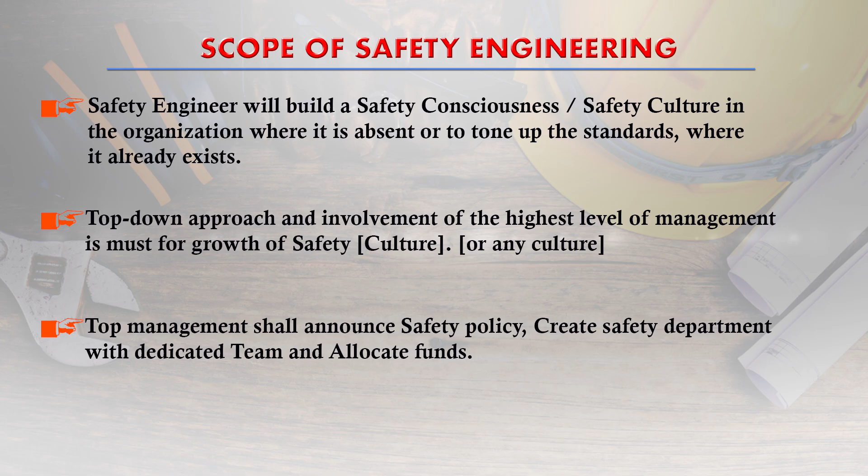Line managers and supervisors shall execute safety policy, create safety awareness, arrange training, and implement safety rules and regulations. The supervisor will ensure that workmen use and maintain personal protective equipment (PPEs) and devices appropriately.

Safety engineers will also ensure sound health of workmen. For example, inhaling welding fumes may not cause imminent harm, but can be very detrimental to health in the long term.

Situations in the workplace may also cause psychological stress or mental stress that may result in accidents. Safety engineers, industrial hygienists, health physicists, occupational therapists, and risk managers may help in reducing such stress and avoiding accidents.

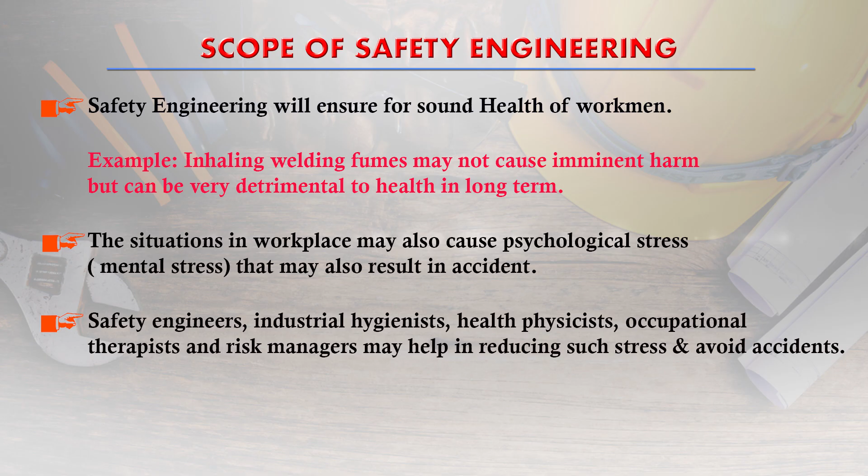Engineers shall design, devise, and develop processes that will reduce or eliminate any risk during operation. For example, employing safety guards for moving machinery parts - this is the task of a safety engineer. Also interlocking machine movements liable to cause injury, etc.

Engineers should also try to avoid the use of hazardous material, or ensure safe handling of hazardous materials.

Question 2: As a safety engineer in an industry, what are the aspects you need to look into? Under what circumstances does the safety policy of an organization fail? Briefly describe the various levels of responsibility in the safety cell of a large organization. What are the different safety functions? What type of occupational health hazards are usually found in Indian industry?

All these questions shall be answered in the subsequent discussions.

Evolution of safety starts in 1750 to 1760. Safety started during the Industrial Revolution and the invention of the steam engine. In 1900, power started being used in industry.

Industrial expansion started taking place, and the increase in workforce resulted in an increase in industrial accidents. At that time, safety was deemed to be about attending to cuts, bruises, and broken bones of factory workmen.

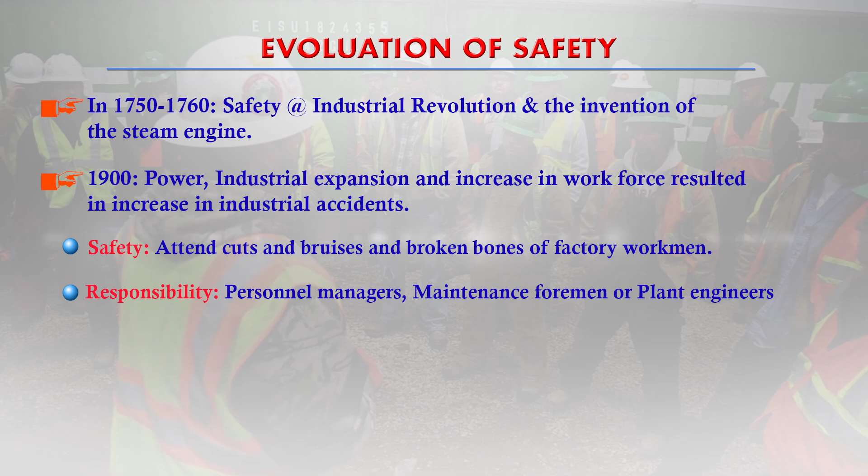What was the responsibility for safety? It was the personnel manager and the maintenance foreman or plant engineers who were responsible for any accident or for enforcing the safety system. What was the action?

Action was that at that time, whenever there was any accident due to cut or bruises or any other unwanted event, action was to guard the machine, or provide a face shield, or make workmen use gloves and wear glasses. That is simply PPE, during some specific activities.

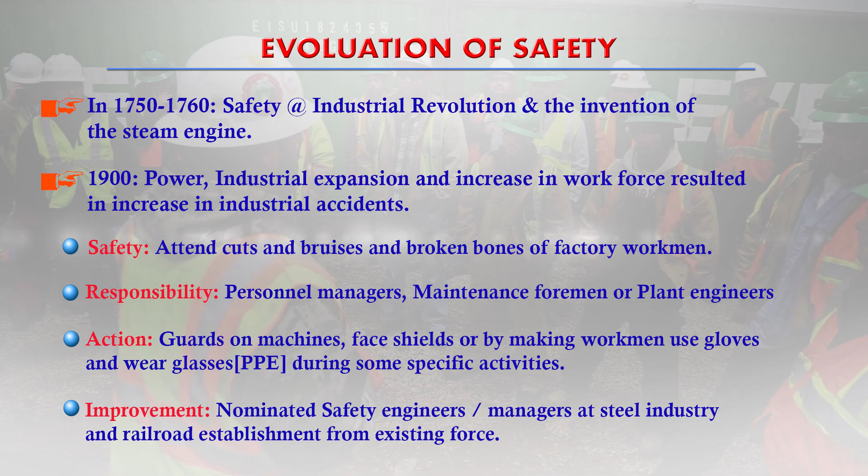This was the action. What was the improvement with due course of time? Safety engineers and managers were nominated at steel industry and railroad establishments from existing force. In 1920, safety codes were published, called the American Standards Association Safety Codes. During World War II, whatever safety efforts were made from 1920 till the start of the war vanished, because the main intention during the war was to win it. Therefore, government had to sacrifice safety considerably in favor of the desire to win the war. Safety was perceived as a non-productive activity till the end of the war.

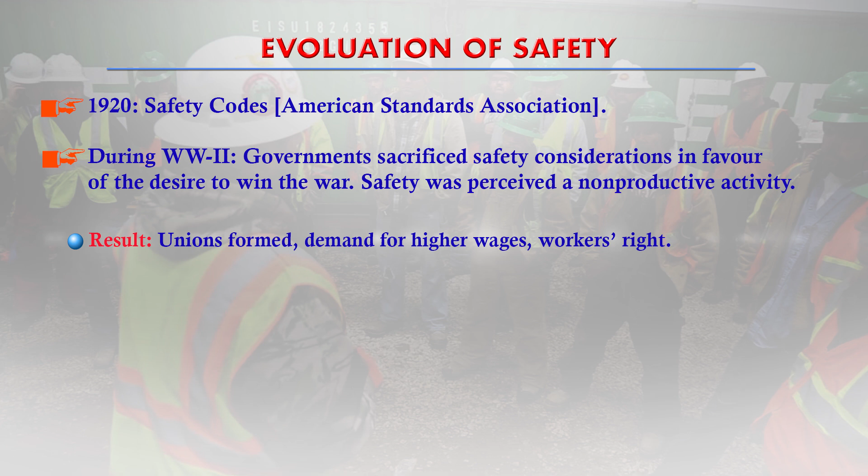What was the result? Unions were formed. Demand for higher wages was bargained, and workers' rights were demanded. All these things came because of more accidents, more unwanted events. After World War II, it was felt that safe working is key to productivity. Why, we will find out in the subsequent talk.

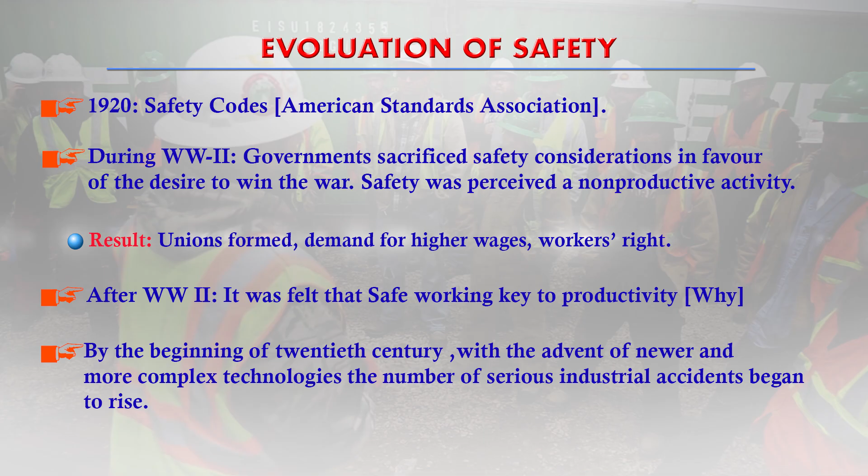By the beginning of the 20th century, with the advent of newer and more complex technologies, the number of serious industrial accidents began to rise. Factory managers felt the need of abating the causes of rising accidents and poor health conditions in workplaces that were affecting productivity.

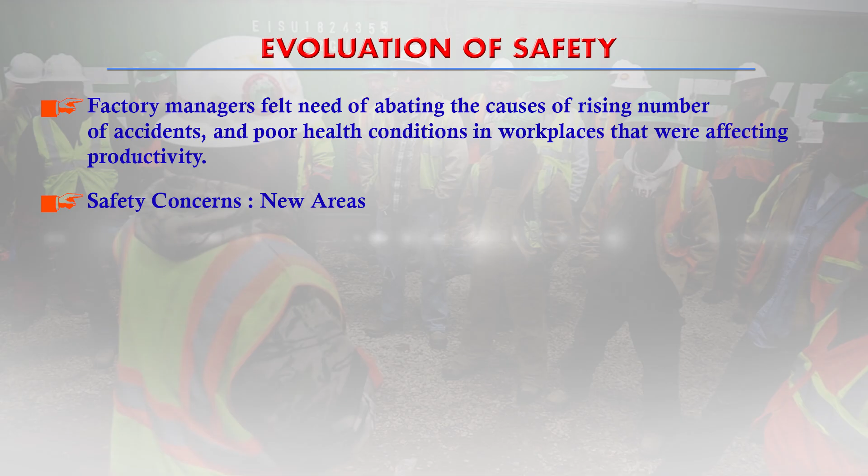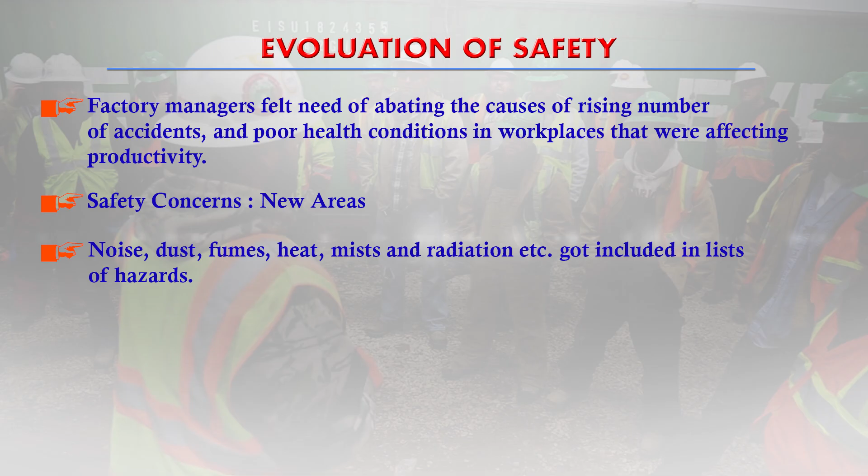Safety concerns were in new areas - noise, dust, fumes, heat, mist and radiation - which started increasing due to new development, new technology and the desire for higher production and higher profitability. They all resulted in higher levels of noise, dust, fumes, heat, mist and radiation, and all got included in the list of hazards.

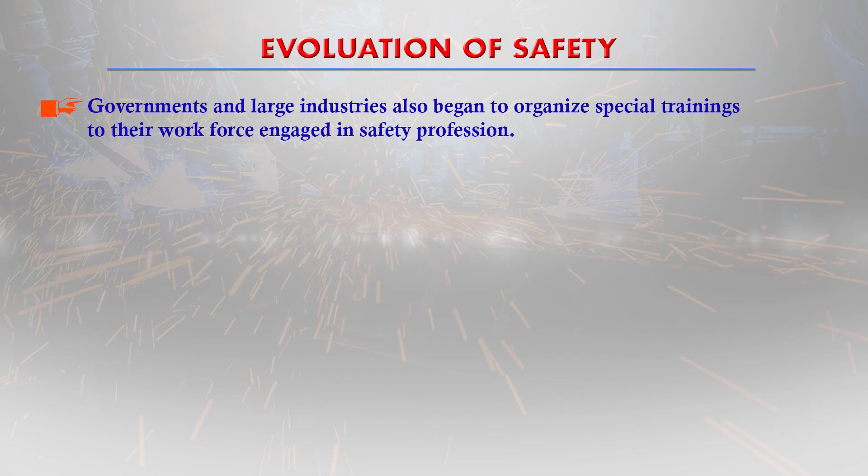Governments and large industries also began to organize special training for their workforce engaged in the safety profession. Industrial hygiene, health physics, ergonomics, design engineering, illumination engineering, audiology, etc. and safety administration were added to safety. Research work and safety theories propelled safety practices into an academic body of knowledge and information.

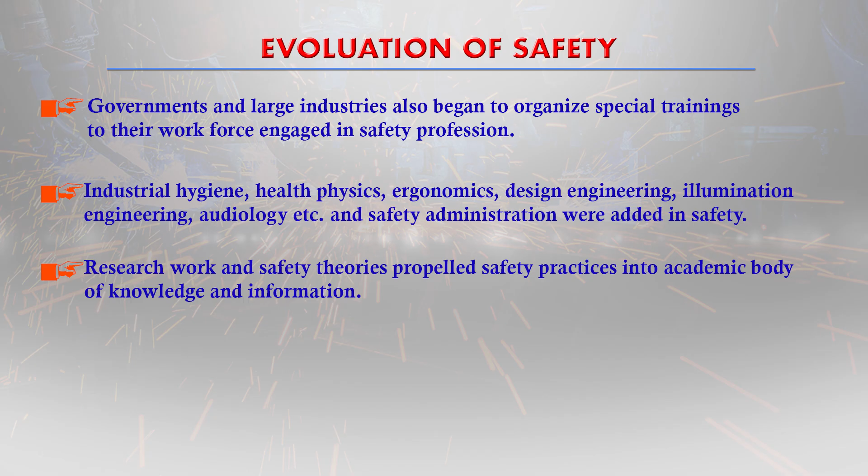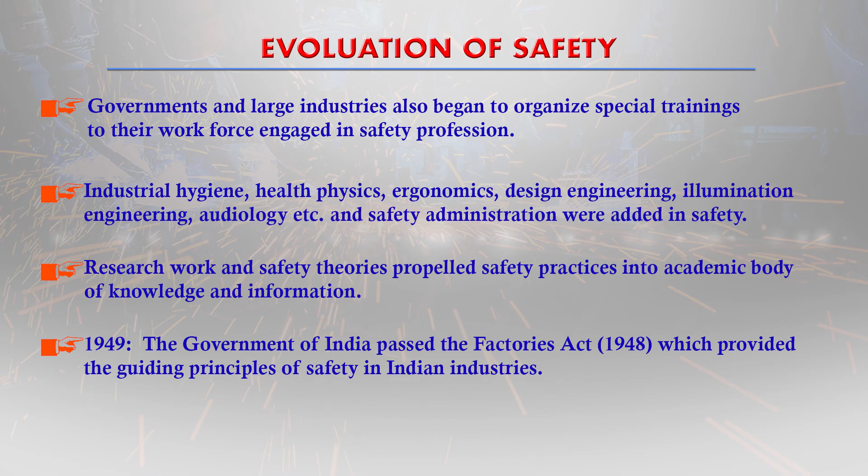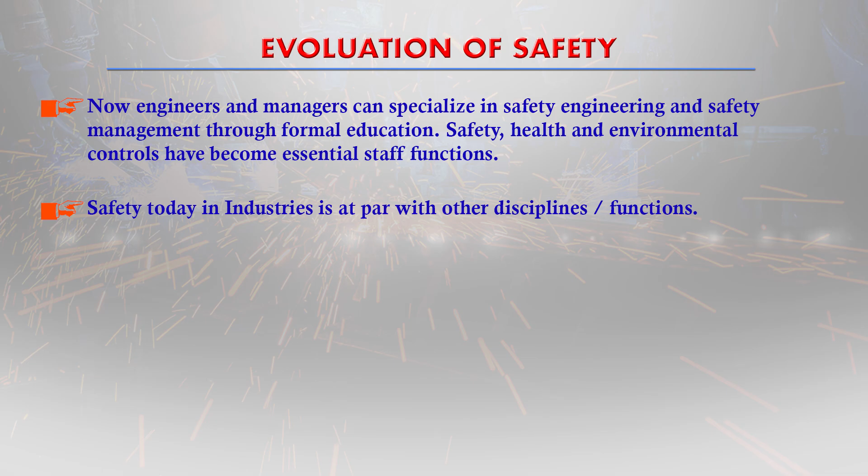In the beginning of 1949, the Government of India passed the Factory Act, which is the backbone of industrial safety for India, providing the guiding principle of safety in Indian industries. Now, engineers and managers can specialize in safety engineering and safety management through formal education. Safety, health and environment controls have become essential staff functions. Safety today in industries is at par with other disciplines and functions.

Every industry must have a safety cell, safety division, a safety department, or in a large organization it is called a safety organization, but it must have some entity which can look after safety with clearly defined objectives and functions. For effective implementation of safety policies, safety shall be a separate department. The head of the division shall be reporting to the head of the organization. Safety personnel will interact with other activities functionally. The structure of the safety cell in an organization will largely depend on the size of its workforce and type of industry.

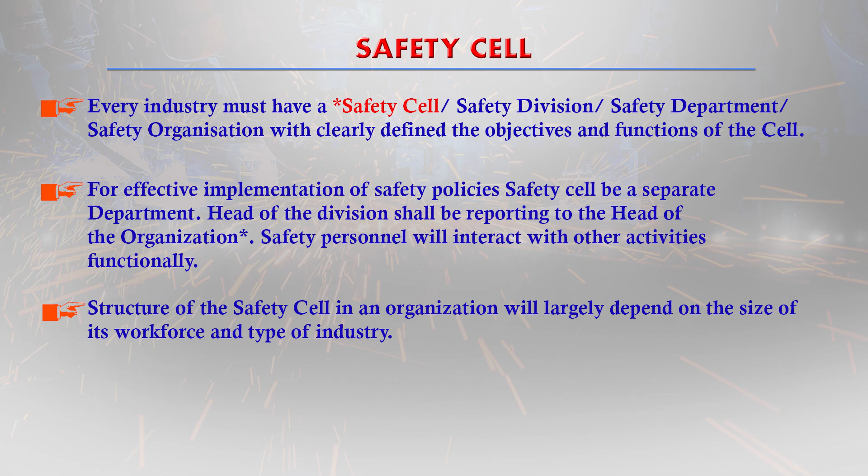A statutory requirement is that as per section 40B of the Factory Act 1948, there must be one or more safety officers employed by certain categories of industries, with qualification as prescribed by the notification of the state government, or if not notified, then as per factory rules. The safety cell structure of a large industry will be discussed in the subsequent slide.

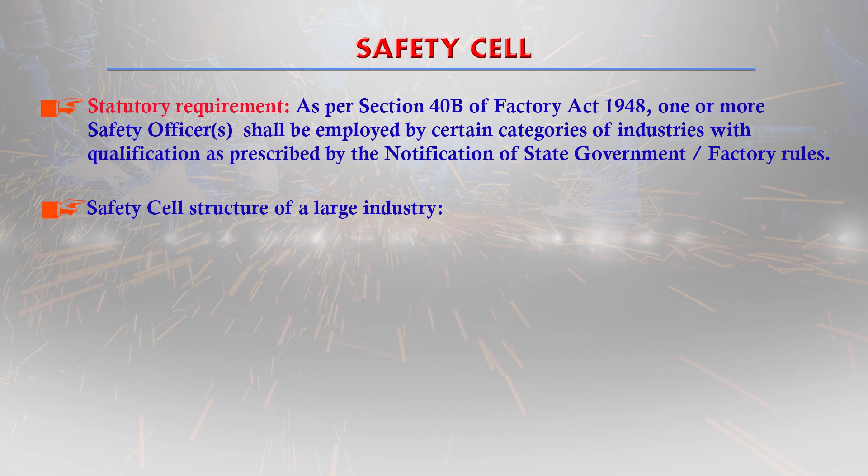In a large industry, a top level manager must be head of the safety cell. The safety chief, normally called general manager, SHE (safety, health and environment), or safety director at the industry level, may report to the corporate director heading the safety cell. There may be several managers reporting to the safety chief, each responsible for special safety functions such as fire, environment, occupational health, claim for compensation, etc. These managers will necessarily interact with all other departments wherever workmen are involved.

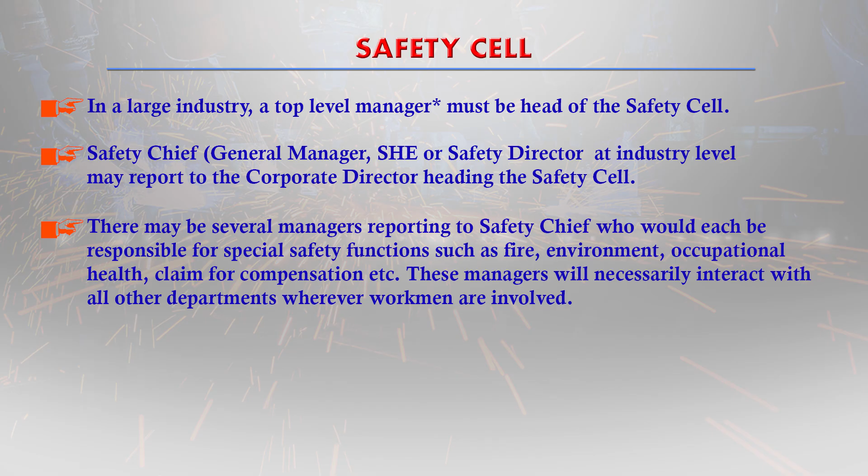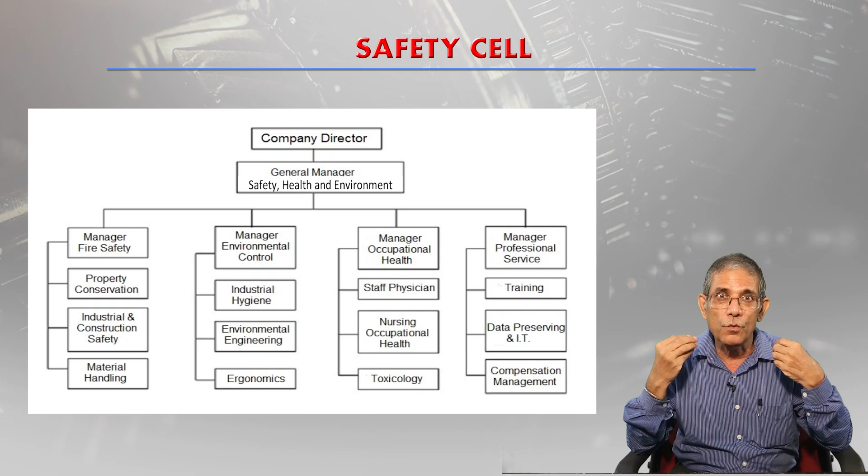There will be a company director, then a general manager safety, health and environment, then several managers depending on the different types of functions - fire safety, environment safety, occupational health and safety, manager professional service. So many departments are created depending on the size of the industry.

If it is a smaller size industry, certainly many roles can be assigned to a single manager. Responsibility of the safety cell at various levels of responsibility are identified and described below. At level 1, the top level, that is the director. This is the corporate level headed by a company director. He will formulate safety policies at this level.

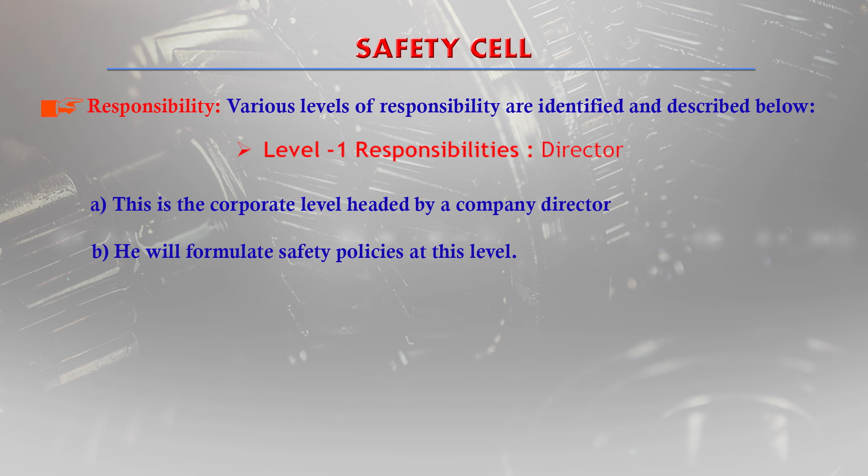These policies will be continuously monitored and upgraded as required. The company director will ensure that safety audits are made regularly. He must be readily available for advising and guiding the safety personnel. He shall appoint a general manager safety at company level.

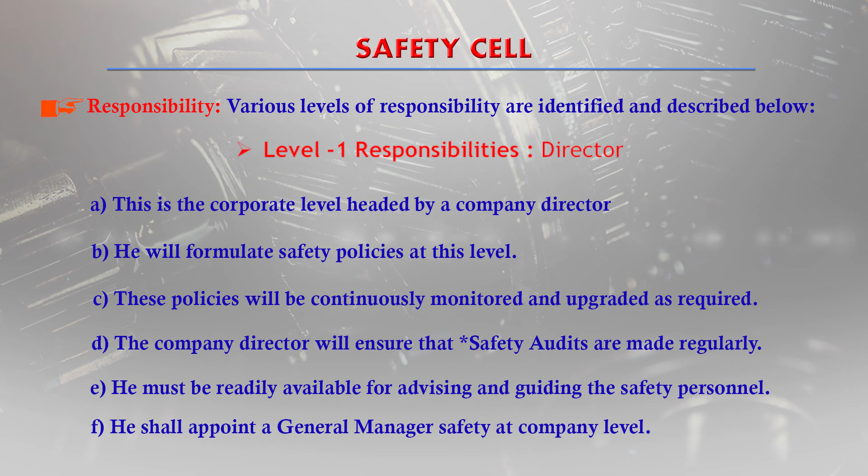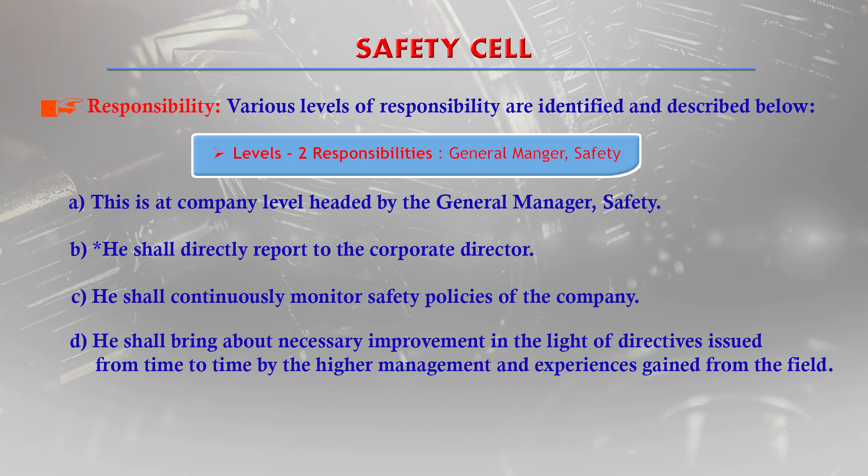At level 2 responsibility, it is the general manager safety. This is the company level headed by general manager safety. He shall directly report to the corporate director. He shall continuously monitor safety policies of the company. He shall bring about necessary improvement in light of directives issued from time to time by higher management and experience gained from the field. He shall ensure that directives and policies are in accordance with governmental regulatory standards.

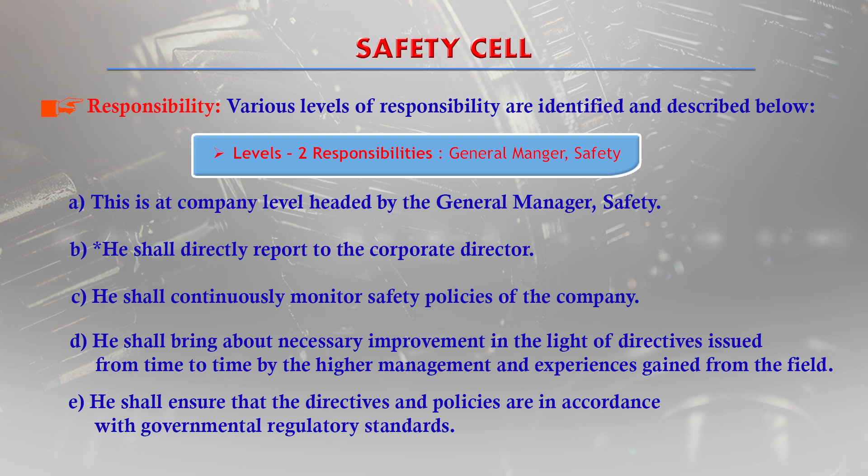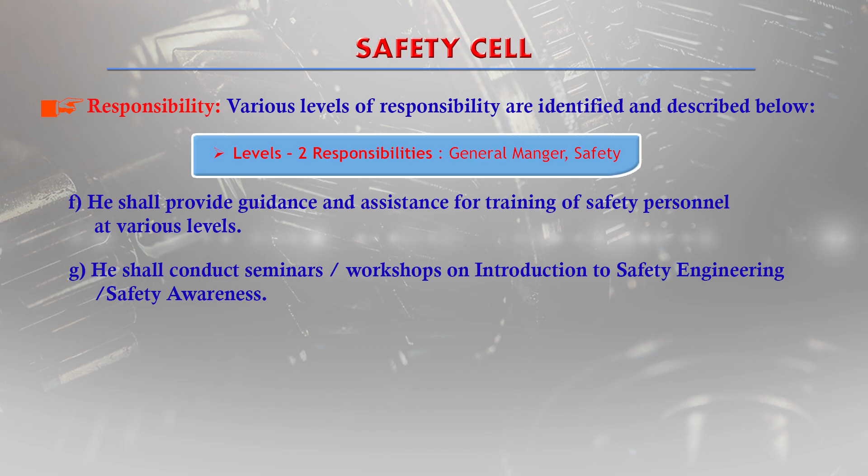He shall provide guidance and assistance for training of safety personnel at various levels. He shall conduct seminars and workshops on introduction to safety engineering and safety awareness. This is an introductory training he will be providing to all the persons.

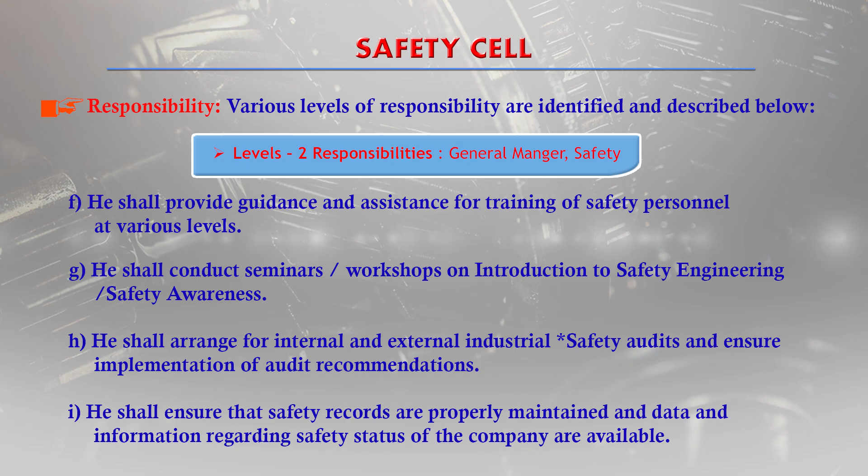He shall arrange for internal and external industrial safety audits and ensure implementation of audit recommendations. He shall ensure that safety records are properly maintained and that data and information regarding the safety status of the company are available. The plant manager shall be at level 3.

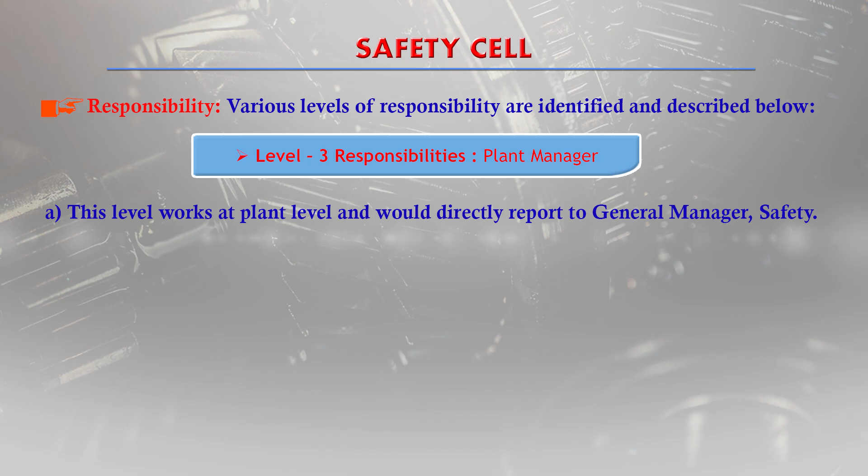He shall be responsible for the following duties. This level works at plant level and would directly report to the general manager safety. Depending on functional requirement, industry may divide the safety function into occupational safety and health, fire safety, environmental safety, or as may be required for other functions pertaining to industries. The plant manager safety may head one or more functions depending upon size and type of industry, and he will report to the general manager safety.

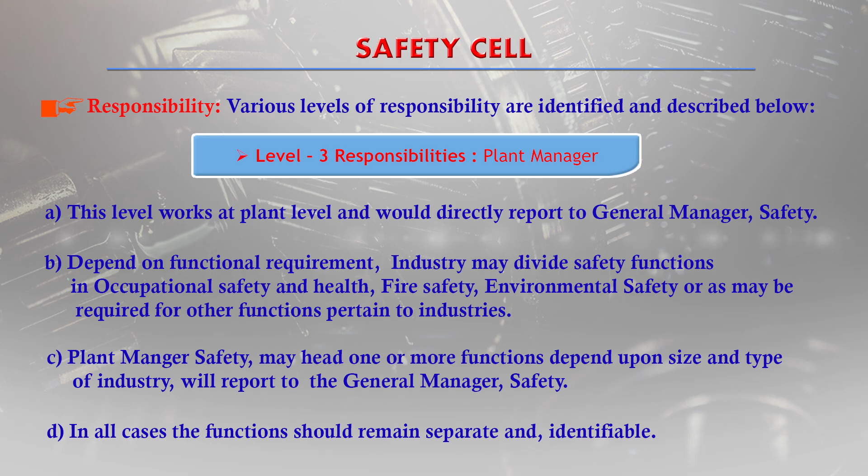In all cases, functions should remain separate and identifiable; it should not be overlapping. Development of procedures for implementing safety measures on equipment and process, and outlining safe operating procedures (SOPs) for workmen in consultation with the shop floor safety supervisors and their feedback, shall be the responsibility of the plant manager. Readiness and preparedness to deal with emergency situations.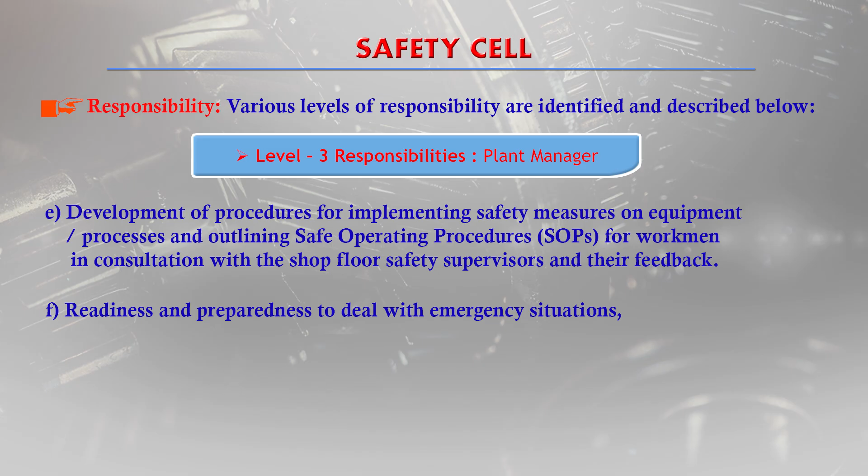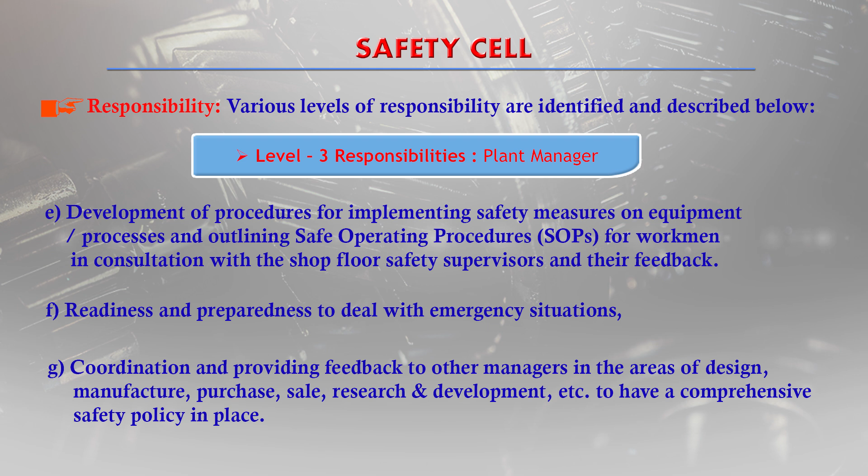Coordination and providing feedback to other managers in areas of design, manufacture, purchase, sell, research and development, etc., to have a comprehensive safety policy in place. To investigate the injury to a workman on the job site and report the matter to higher officials.

At level 4, it is the shop floor, and this is most important for prevention of accidents. Earlier we discussed the issue of policy, guidelines, advisory functions, as well as enforcement functions. Now it is important that actually, practically, people at the shop floor in the safety cell are implementing the safety system.

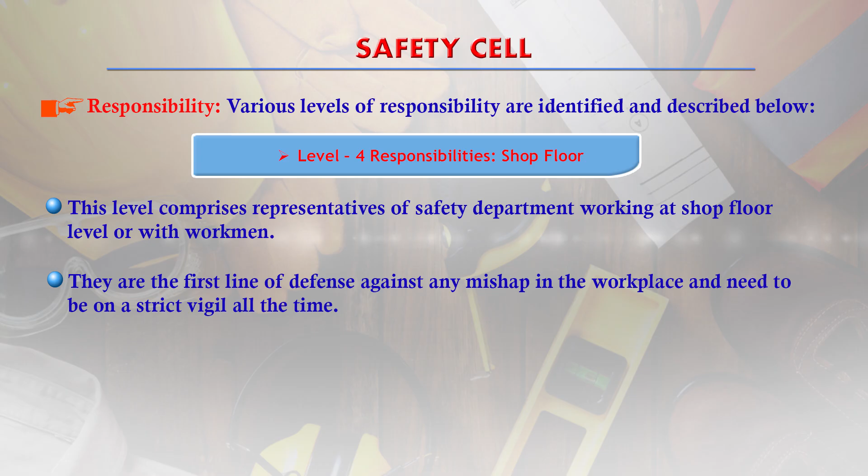At this level comprises the representative of the safety department working at shop floor level or with workmen. They are the first line of defense against any mishap, or we can say they are the first responders in the workplace and need to be on strict vigil all the time. The personnel will be responsible for implementation of safety procedures - that is the main task. All steps in safety procedures are followed and no step is avoided. They train the workmen on procedures and guide them in adopting the procedure.

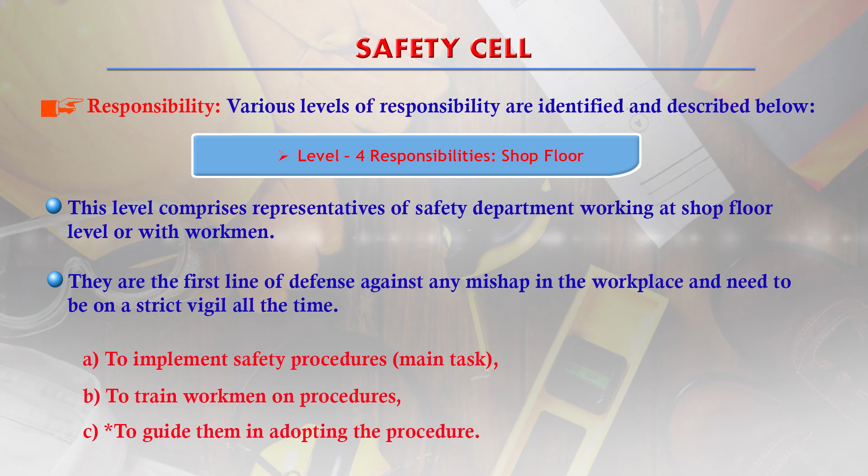At this level, he will also monitor and analyze how workmen follow safety procedures and take preventive action where necessary. Where they are not able to follow the safety procedures, the shop floor safety person will guide the workmen on how to implement the safety procedure. And he will also provide all support for maintenance of the environment and its preservation.

The Plant Safety manager has to put due importance to feedback and suggestions for continuous improvement on safety aspects. Most importantly, the personnel at level 4, that is shop floor persons, will conduct safety drills at regular intervals.

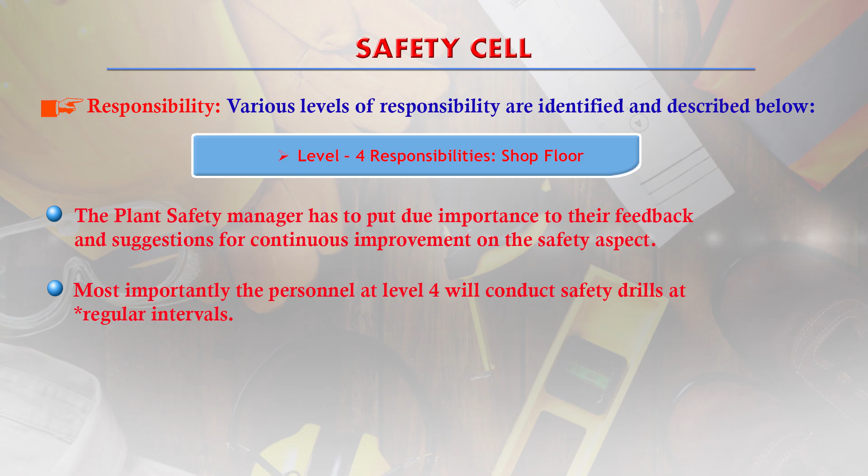Why are safety drills required? Because this is practical safety training. Until we practice safety, it will be difficult to remember the good things in safety, and we will not forget any steps so that in case of emergency we can control and help manage the emergency management.

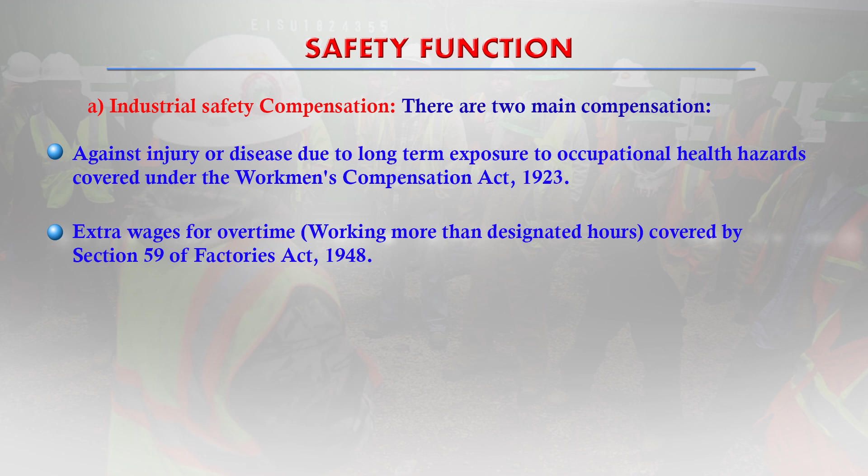Main function of the safety cell is industrial safety compensation. There are two main compensations: against injury or disease due to long-term exposure of occupational health hazards, covered under the Workmen Compensation Act 1923; and another is extra wage for overtime working more than designated hours. Designated hours normally in India is 8 hours, however it may be reduced or increased depending on the task and the rules of the country. This is covered by Section 59 of the Factories Act 1948 in case of Indian industries.

Property conservation means accidents should not happen and personnel should not be harmed. Another main function is property conservation. Under this segment, the role of the safety engineer is to ensure that apart from safety of the workmen, property of the organization is also safeguarded from all possible hazards, mainly fire.

Safety in material handling: the Indian government has several IS codes for guidance on safe material handling procedures to be followed. For example, IS 8324-1988 is the code of practice for safe use and maintenance of non-calibrated round steel link lifting chains and chain slings.

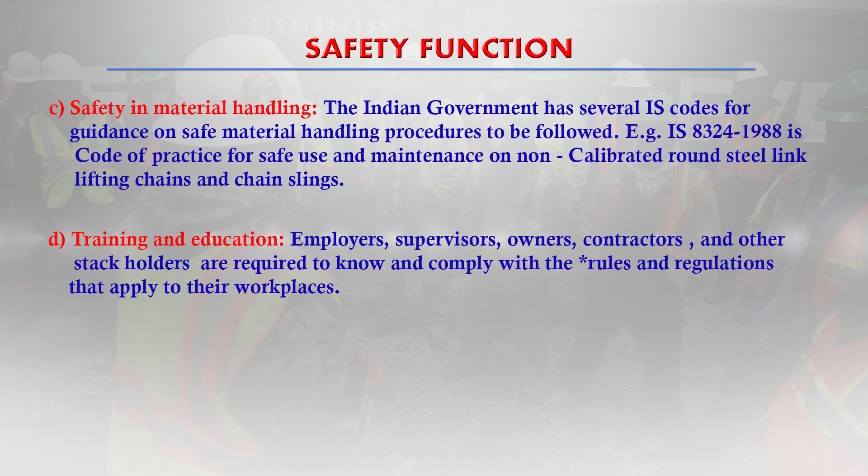Training and education is also a function of the safety cell. Employers, supervisors, owners, contractors and other stakeholders are required to know and comply with the rules and regulations that apply to their workplace. Industrial hygiene is also a main function of the safety cell.

A workplace could be a source of risk through exposure to gases and radiation, as well as hazards relating to temperature, noise, micropollutant contamination. This is to be controlled by the safety cell. The safety engineer shall maintain the hygiene of workmen, mainly by reducing or eliminating the ill effects of acidic gases and hazardous dust, heat stress, and harmful organic gases and vapors.

Illumination problems, that is less light or more light, and noise pollution, more noise or very less noise. Less noise is acceptable, but more noise will not be acceptable.

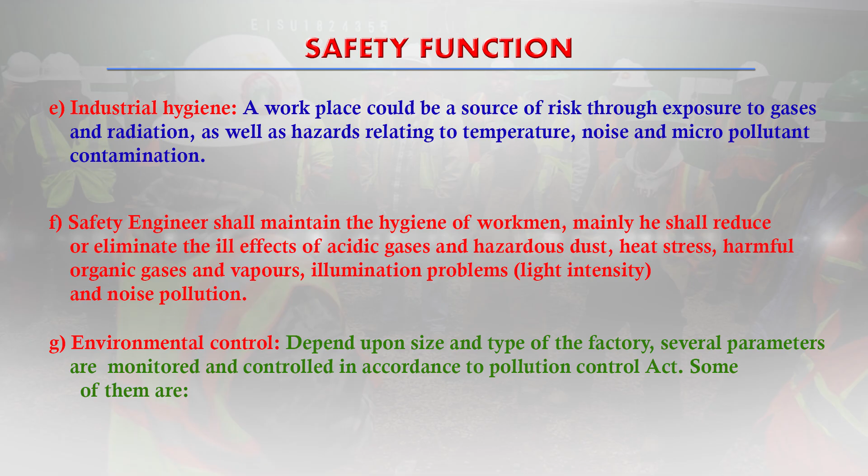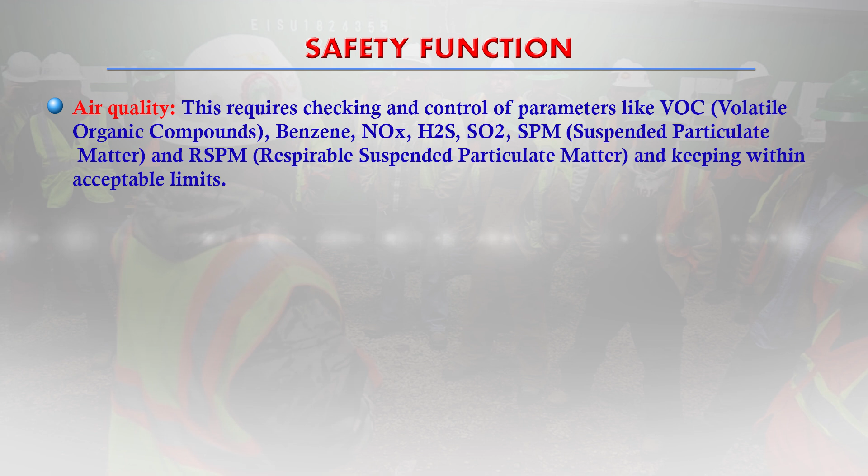Environmental control is also a function of safety. It depends upon the size and type of factory. Several parameters are monitored and controlled in accordance with the Pollution Control Act. Some of them are air quality, which requires checking and control of parameters like VOC (volatile organic compounds), benzene, NOx,

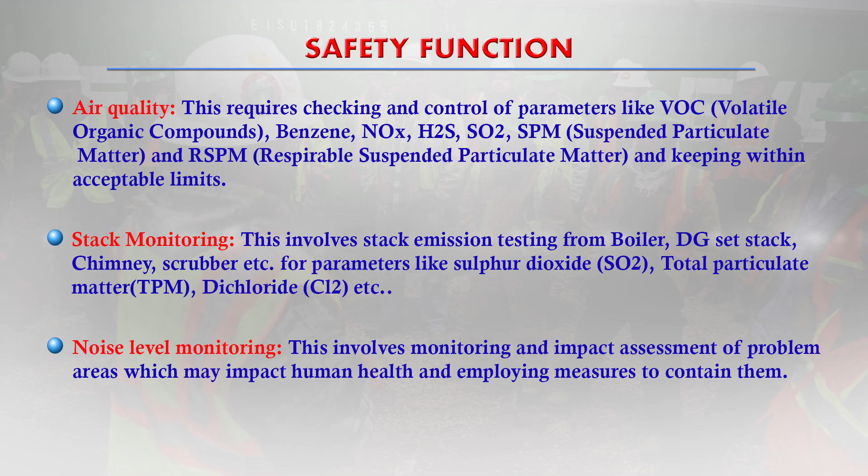H2S, SO2, SPM, suspended particles and so many other parameters. Similarly, stack monitors - sulfur dioxide and TPM also come out and are to be monitored. Noise level monitoring also has to be done, because more or less noise depends on the area and it should not impact human health, and employing measures to contain them.

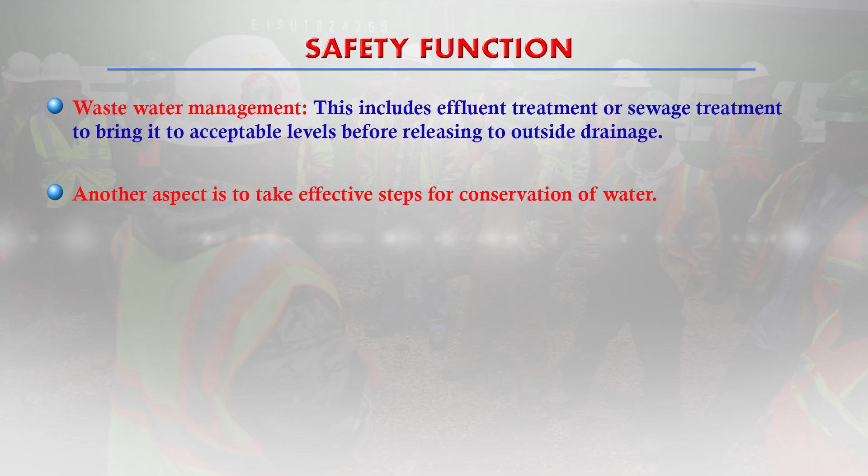Occupational health is also a main safety function. The major occupational diseases of concern in India are accidents, silicosis, musculoskeletal injuries, coal workers' pneumoconiosis, etc., and so many other diseases that must be taken care of by the safety function.

Health and safety information system, normally called MIS in some industries, and maintaining proper records of all stages of the safety programs is utmost important, because records of safety training and drills allow you to maintain repetitively and keep the program alive in people's minds. A record of accident analysis, record of hazardous waste, etc., is also required by different government institutes, and it is mandatory to maintain them.

Thank you. If any question is there, then we can further discuss. However, we will summarize the total things we have to learn, and we will take this discussion ahead in the subsequent discussions. Thank you.